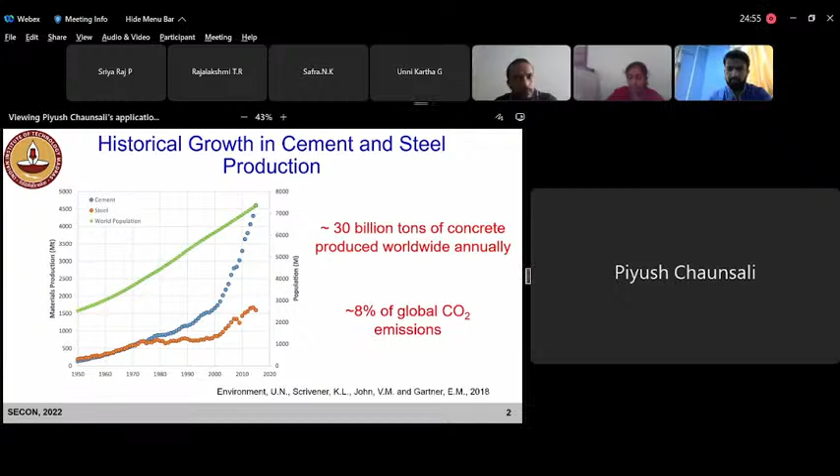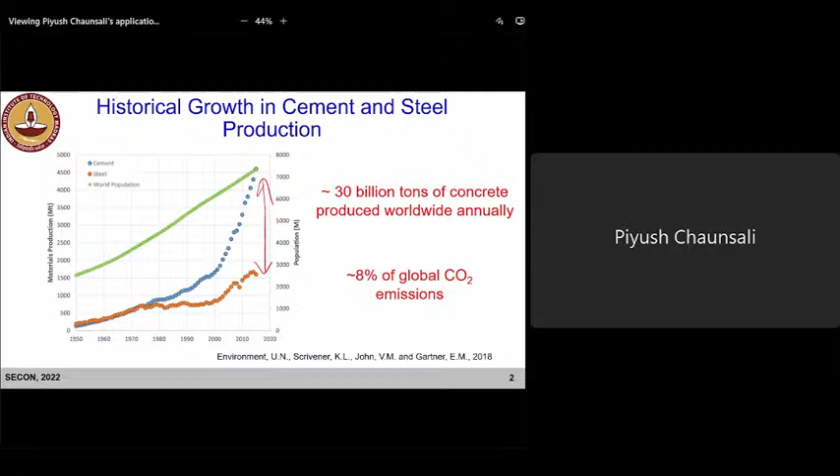If we look at historical growth in cement and steel production, we notice that in the last 65 to 70 years, the growth in cement production has been significantly higher than steel production. That's evident from this plot. You also see how fast population has grown, so there has been a tremendous increase in cement production globally.

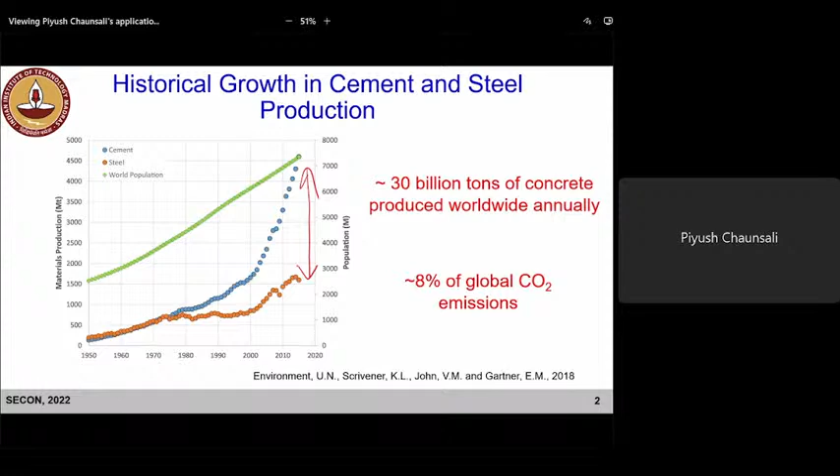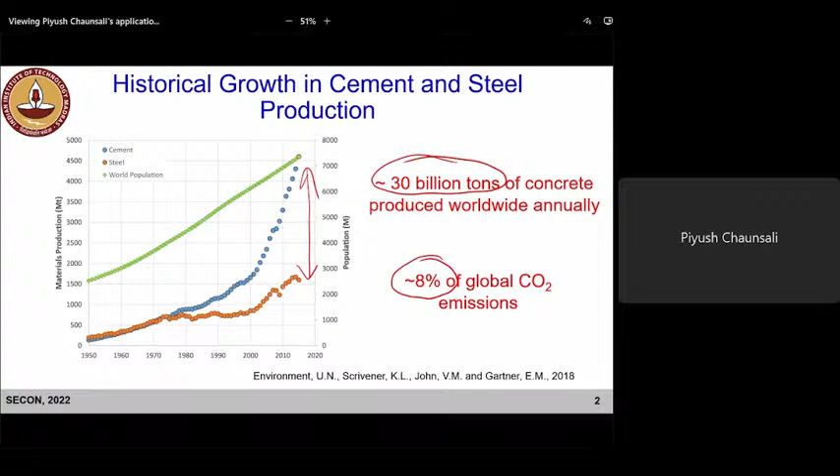If you look at the numbers, cement is used to make concrete, and roughly 30 billion tons of concrete is produced worldwide annually. That's a very huge number. Cement manufacturing contributes to roughly 8% of global CO2 emissions, so there's a significant carbon footprint associated with it. So there has been a push to reduce the carbon footprint of cement manufacturing so that we can cut down the carbon footprint of concrete.

These charts show a comparison. The left one, if you look at just a building, shows existing building versus new construction, and the contribution of construction and maintenance towards global CO2 emissions. Relatively, if you compare new construction versus existing buildings, for existing buildings the heating over lifetime contributes a larger chunk. For newer construction, this share is less, but still you see how much share construction and maintenance has.

Now if you look at the construction of a building, for example, a significant fraction comes from concrete. There are other materials also like steel, bricks, windows, insulation, but see the contribution of concrete. And in concrete, we know we have cement, gravel, sand, etc., and other SCMs. So a significant part of the carbon footprint in concrete is because of cement manufacturing.

In cement manufacturing, we use limestone, and the decarbonation or decomposition of limestone, where CaCO3 decomposes into calcium oxide and CO2, leads to CO2 emissions. This is what happens, and given the significant amount of concrete being produced annually at a global scale, there is a need to look for alternative binders which will have a lower carbon footprint, offering sustainability without compromising on other properties.

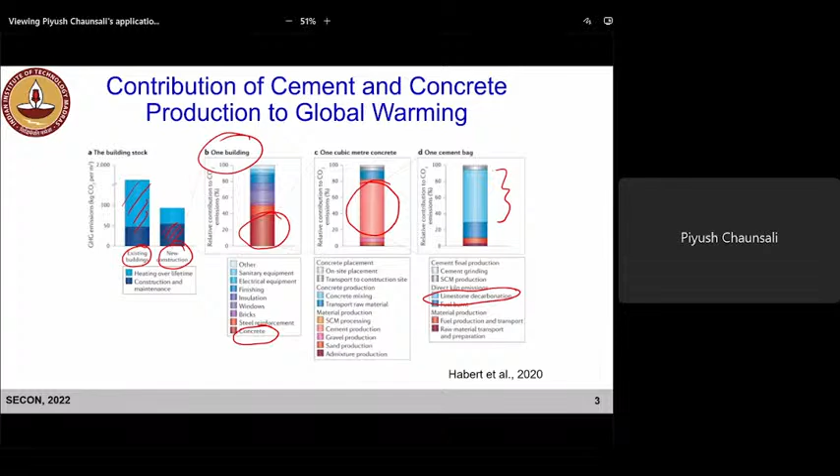With that context, I'd like to introduce this cement: calcium sulfoaluminate belite cement. Some of you may have heard of it, many may not have, but we'll go through the basics. CSAB cement contains these phases: C4A3S, which is calcium sulfoaluminate, C2S, and C4AF. We are quite familiar with Portland cement, which contains C3S, C2S, C3A, C4AF. What we notice is that the CSAB phase does not have C3S—that's the main difference—and it also doesn't contain the C3A phase.

To make CSAB cement, we don't have to go to really high temperatures. For Portland cement, we have to go to 1450 degrees Celsius, but CSAB cement can be manufactured at 1250 degrees Celsius, so there's a reduction in temperature requirement. The raw materials are similar to what we use for Portland cement: limestone, clay, bauxite, and gypsum.

If you look at the phase composition, yeelimite, C4A3S, is the calcium sulfoaluminate phase, also called yeelimite. Because Alexander Klein patented this, it's also called Klein's compound, C4A3S bar. Apart from yeelimite, this cement contains belite, C4AF (tetra calcium aluminoferrite), and calcium sulfate.

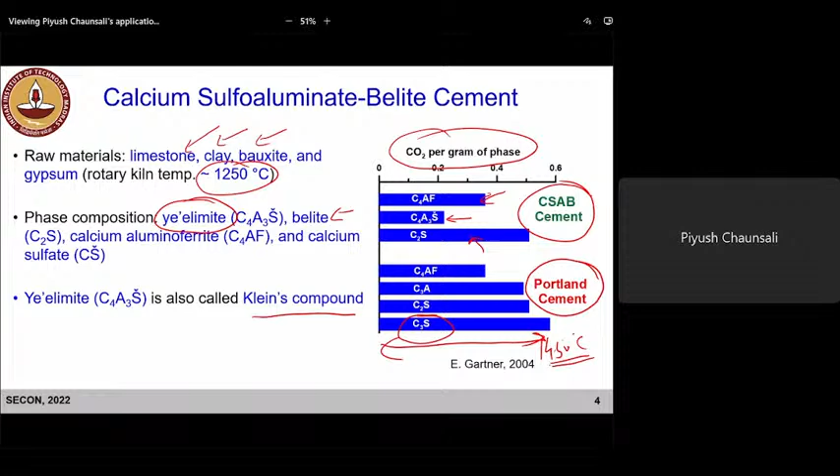Obviously this phase composition changes and that affects the properties. So that's what I will discuss, how different phase composition will give you different properties and how we can manipulate these properties. Overall, the good news is there is a less carbon footprint of CSAB cement.

This ternary diagram shows comparison between PC, Portland cement, and CSAB. CSAB cement has more alumina. In this direction, alumina content is increasing. In this direction, silicon content is increasing. In this direction, calcium content is increasing.

We can see generally CSAB phase composition is closer to this corner, so it has more alumina and less calcium. So less limestone is required to manufacture this cement, which also results in reduced carbon footprint associated with manufacturing CSAB cement.

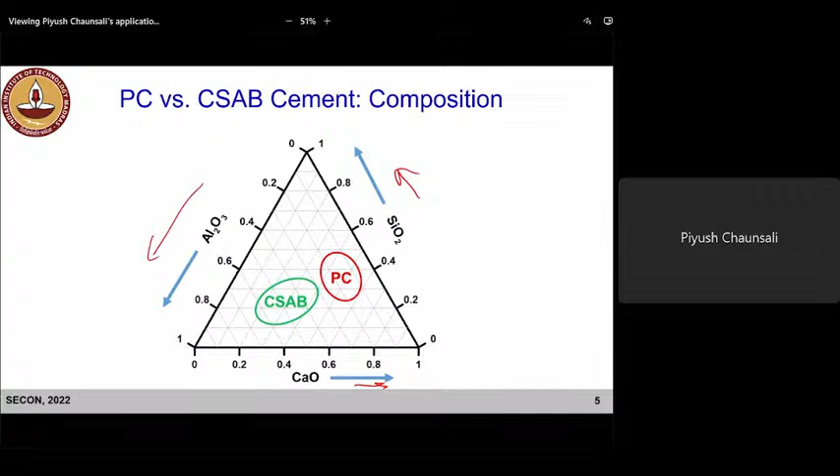So hydration of CSAB cement is different than what we see in Portland cement. This C4A3S, which is calcium sulfoaluminate cement, can just hydrate in presence of water and form monosulfate. Monosulfate is the phase we also see in Portland cement hydration, when later on ettringite converts to monosulfate when the gypsum depletes. Apart from monosulfate, you have formation of aluminum hydroxide. This is the reaction which takes place just in presence of water.

But since we have gypsum in the system, again we are using the cement chemistry shorthand notations, so please refer to these for more clarity. Yeelimite phase can react with gypsum and form ettringite. This is the ettringite. AFt phase also gives you aluminum hydroxide.

Now if CSAB cement is mixed with Portland cement, or we supply additional calcium hydroxide, CH, now we have a larger amount of ettringite which is formed. So these two reactions contribute to expansion, and we'll see how we leverage that expansion to our advantage.

Since I mentioned that CSAB cement may also contain belite, C2S hydration will lead to formation of CSH and calcium hydroxide, as we know. In this case, since AH3 is formed, C2S can also react with aluminum hydroxide and form another phase, C2ASH8, strätlingite.

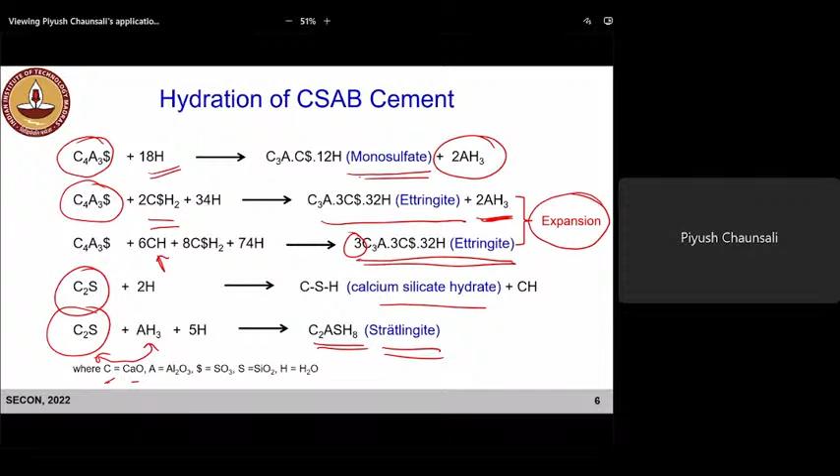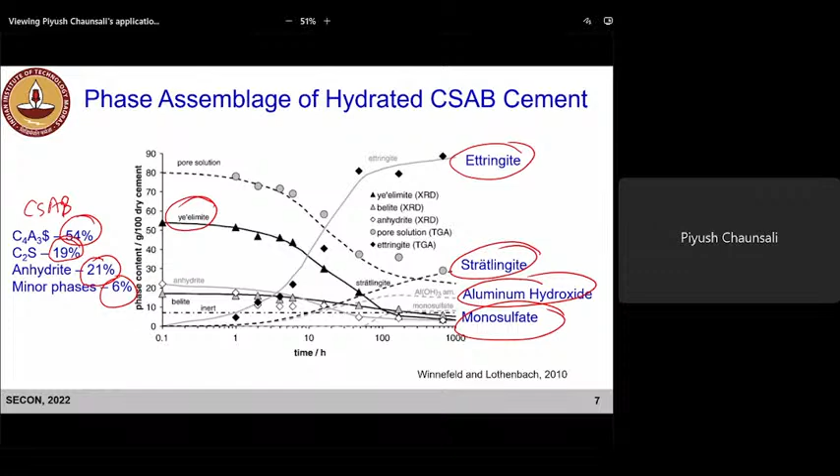So we know about the phase composition. Let's now look at what happens to the hardening behavior, how quickly these CSAB cements harden. That's also very important.

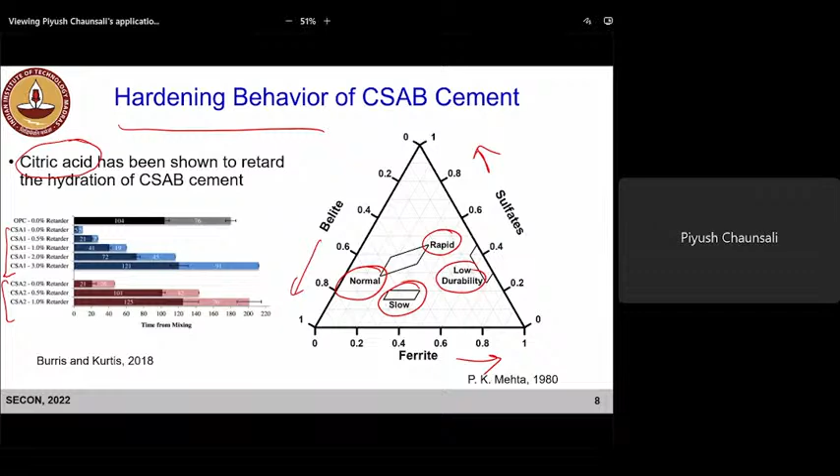Here you see the effect of retarder, in this case citric acid, on two types of CSA cement, CSA1 and CSA2, and how the setting time was influenced by addition of citric acid. So citric acid has been shown to retard the hydration of CSAB cement, but more research is going on looking at other admixtures that can be used to control the hardening behavior of CSAB cement.

So I said that when we talked about the hydration reactions, when you are forming ettringite in presence of gypsum, and when you have both gypsum and portlandite, you have formation of ettringite. Those are expansive reactions. First of all, when we talk about expansion, certainly we don't feel comfortable.

And we know that with time, as it hardens, there is going to be shrinkage, drying shrinkage as you call it. And that drying shrinkage, concrete is shrinking, but restraint is not letting it shrink. So what happens? Concrete is under tension. And we know that concrete is weak in tension.

So what happens when the tension or tensile stresses exceed the tensile strength of concrete? There is cracking, that's what happens. It's called restrained shrinkage cracking. We look at, you take the example of pavements, you see transverse cracking.

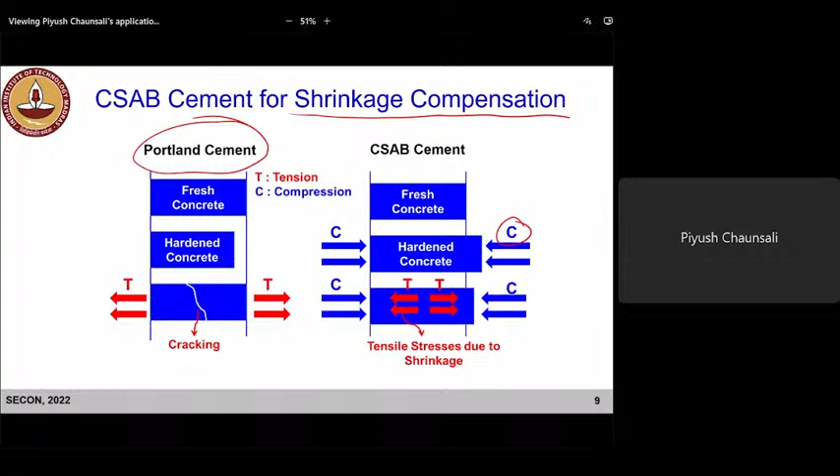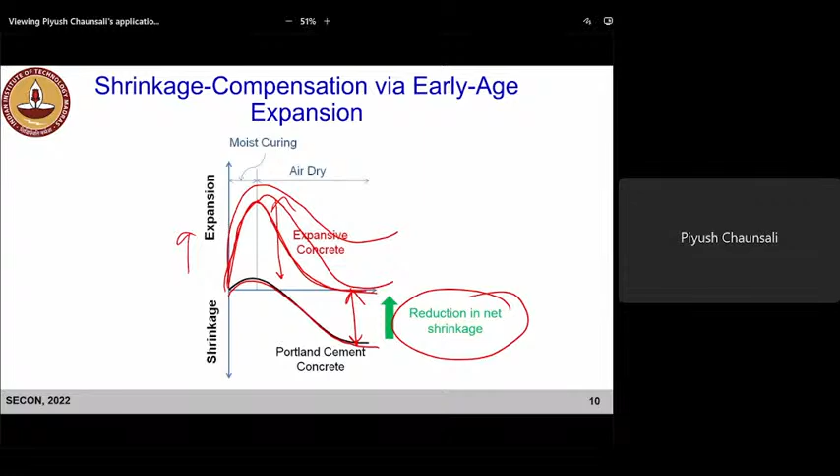So there is a reduction in the net shrinkage. That's what we mean by shrinkage compensation. That's very advantageous when we want to develop a concrete which will prevent shrinkage cracking.

Now we can have both expansive and non-expansive cements. In some cases, we don't want expansion. How do we then tailor or manipulate this property?

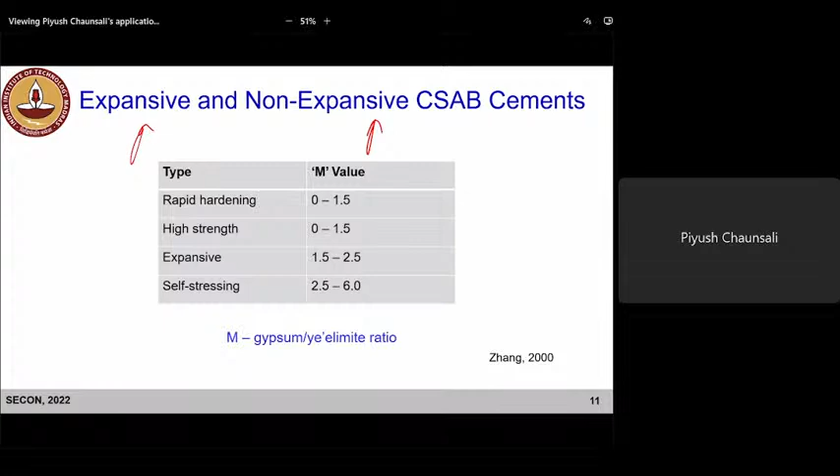Here you see M value is nothing but a ratio between gypsum and yeelimite. Yeelimite again is C4A3S, calcium sulfoaluminate phase. This ratio will affect its hardening behavior and also expansion. If the M value is greater than 1.5, the system expands. If the M value is below 1.5, it's not an expansive system, but you are able to get rapid hardening, high strength. So as a user, this is one way to manipulate its expansion and accordingly the hardening behavior.

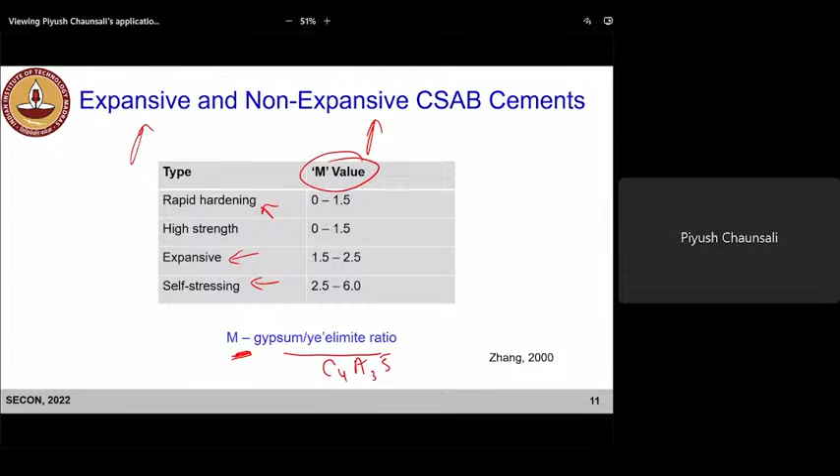So CSAB cement offers you both. It is a low CO2 binder because less limestone is used to manufacture CSAB cement. CSAB cement manufacturing requires rotary kiln temperature of around 1250 degrees Celsius, so you have 200 degrees Celsius difference.

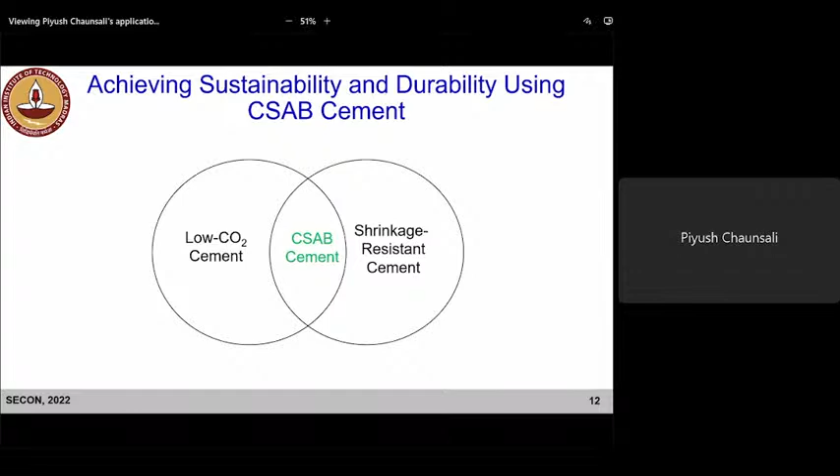Also, this CSAB cement clinker is more porous than Portland cement clinker, so the grinding energy requirement to make this cement is less than what is required for Portland cement clinker. So there are so many advantages - that's why we said low CO2 cement, and we've seen that we can also leverage this expansion for making shrinkage resistant cement. So both low CO2 cement, sustainability, and durability - both can be addressed through the use of CSAB cement.

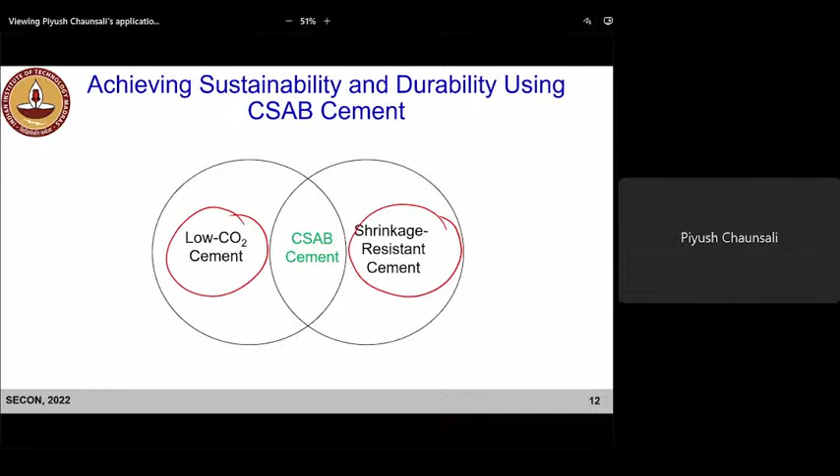So there are already standards. I am showing you the recent shrinkage compensating concrete guide by the American Concrete Institute, ACI 223, which goes through the design - how do we use these cements to develop shrinkage compensating concrete?

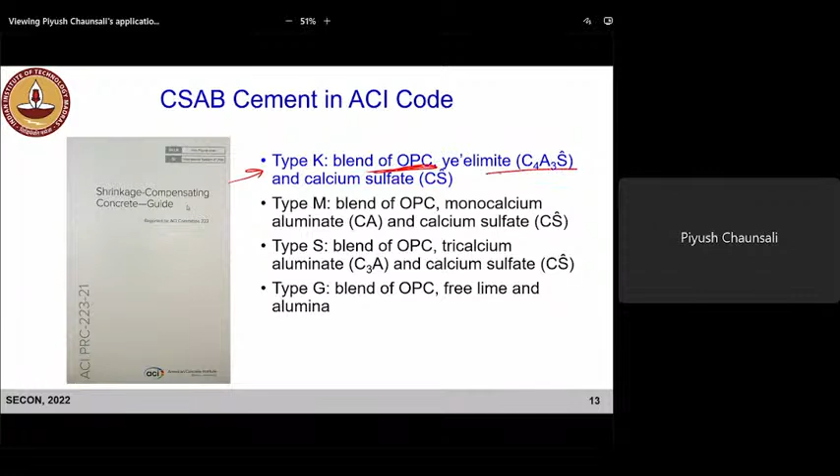So there is already this ACI standard, and in this standard they talk about different expansive cements. One of them is type K, which is nothing but a blend of Portland cement and yeelimite - the calcium sulfoaluminate phase and calcium sulfate. So when we mix Portland cement with yeelimite and calcium sulfate, you get this type K cement.

Okay, there are some other classes. The idea here again is all these are expansive cements, meaning there is an increase in volume as cement hydrates, and we use that expansion to basically design shrinkage compensating concrete. Towards the end of my lecture, we'll also see how we use these guidelines to develop something where we can compensate shrinkage. But type K cement is basically a mix of Portland cement and CSAB cement.

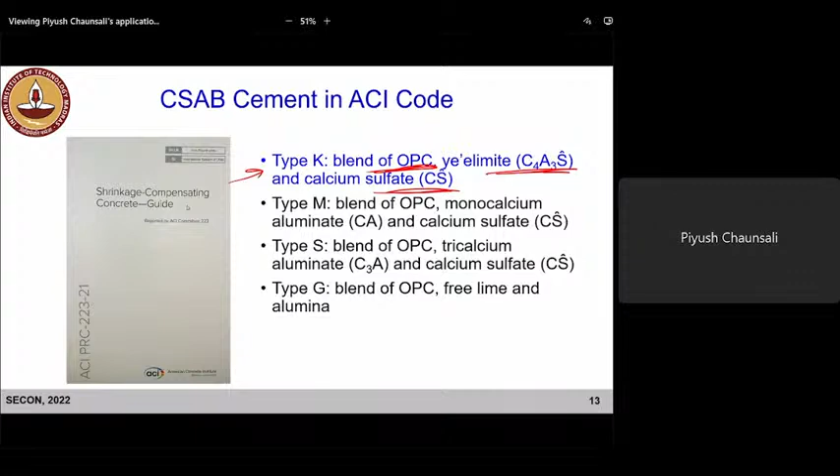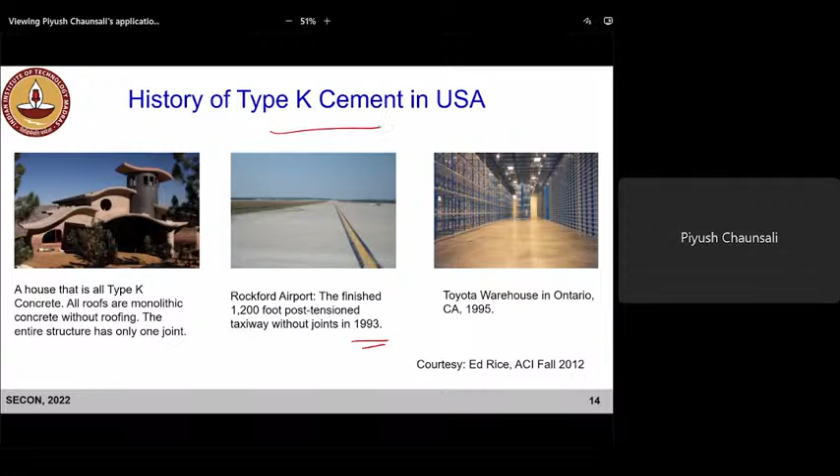Those of you who are interested in knowing which companies make CSAB cement globally, I have just listed a few from USA, Europe, and China. So there are already companies which make this cement.

In some cases, they sell a product like concrete rather than cement. In this case, you see here a zero shrinkage concrete product - rather than selling a cement, they sell this concrete product. The idea again is to have expansion and use that expansion to develop something which can compensate the shrinkage.

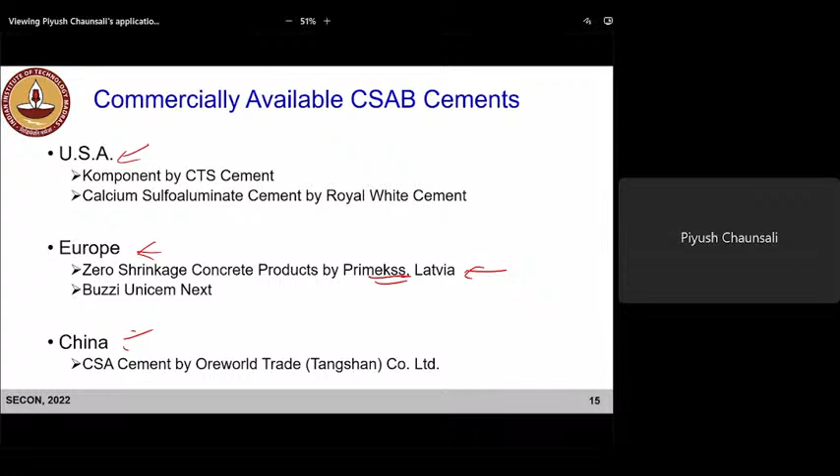Okay, so this I'm just showing you various properties of CSAB cement and concrete. So the left figure is for concrete.

CSAB cement can also be used as an expansive admixture. As we saw, type K cement is an expansive cement where CSAB admixture is used. In that case, CSAB cement enhances your strength. When we add CSAB cement to Portland cement, there's some increase in strength, and you see the effect of other admixtures too. So you don't compromise strength.

When we use CSAB as an expansive admixture, in some cases you see increase also. Here is an example of concrete, here is an example of paste, from our lab here at IIT Madras, when CSAB cement is used as an expansive admixture. In a paste, you see the strength increases.

5 to 10%, that's the typical replacement level, though it's suggested around 10 to 15%. Because when we use CSAB cement as an expansive admixture, we are basically inducing expansion. So this is basically an OPC-CSA blend, where 85 to 90% is OPC and 10 to 15% is CSAB. Again, this is for getting the expansion so that we can develop shrinkage compensating property.

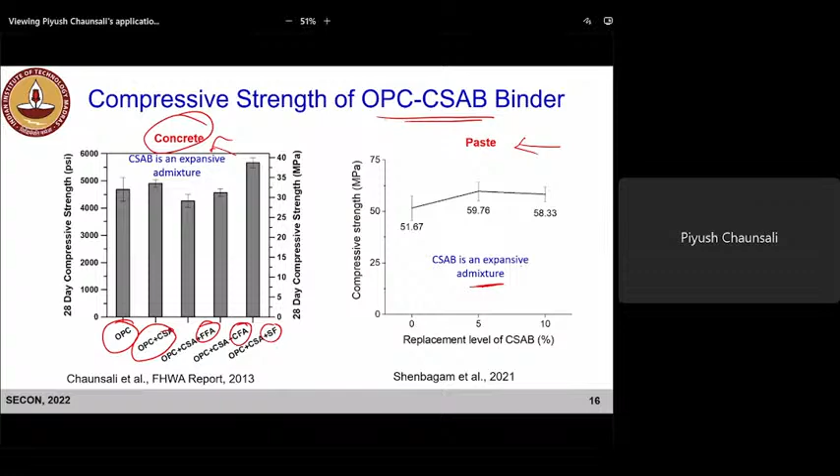But we'll see later, in this case CSAB cement is a sole binder. So you can have a CSAB cement which will not expand, basically a non-expansive CSAB cement. And we know this will depend on the M value. What is the M value? How much gypsum you have, what is the gypsum to yeelimite ratio. So we have both types, expansive and non-expansive.

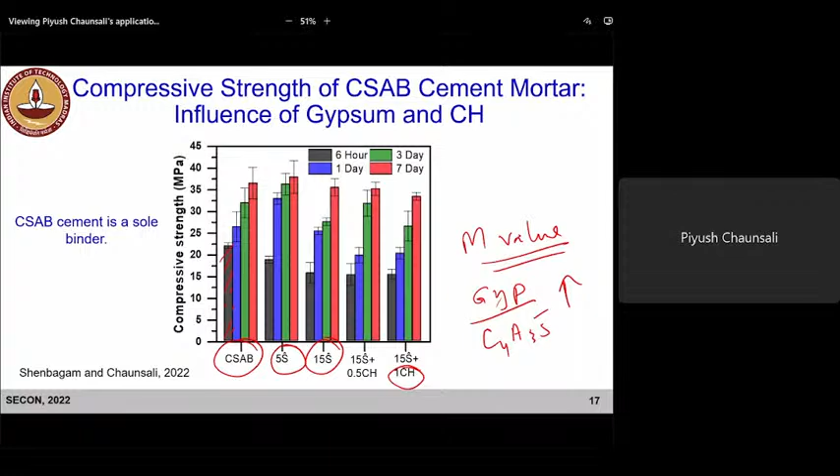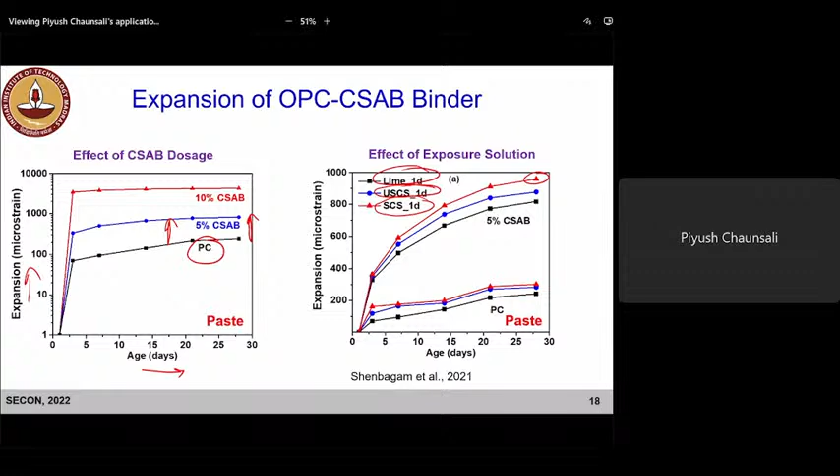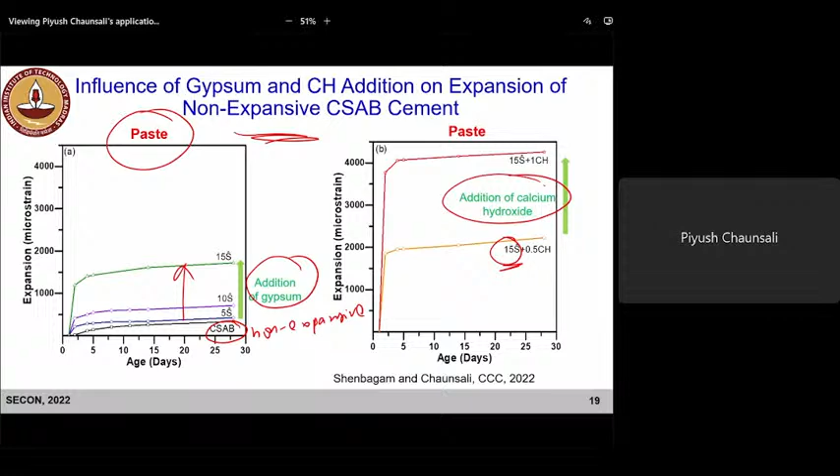But we'll also look at whether there are any changes in the pore structure. When we have so much expansion, can we differentiate non-expansive and expansive systems based on the pore structure?

Before that, in CSA cement there is a reduction in pH. Portland cement pore solution will have 13 to 14 pH, but as we add CSA, there is a reduction in pH. In this study though, we saw that the minimum pH was still around 13. Why is this important? Because when we talk about carbonation, when the pH is low, becomes 10 or 11, the propensity towards carbonation increases, and carbonation may then induce corrosion.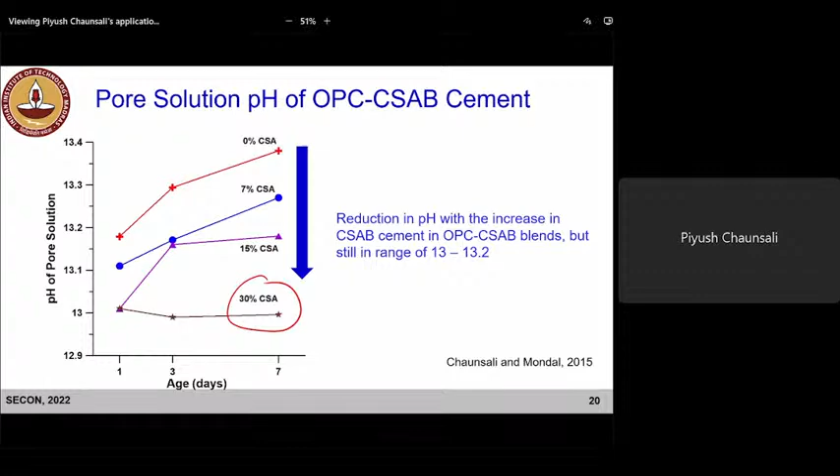So a lot of work is going in that direction where people are looking at the carbonation of CSA cements and what is the propensity of steel corrosion in these systems, and how do we reduce that.

For hydrate mineralogy, X-ray diffraction can be used to look at the phases formed during hydration of CSA cement. You see significant amounts of ettringite, the crystalline phase responsible for expansion. As we increase the amount of gypsum, we see an increase in the amount of ettringite. Also notice the Y, the yeelimite peak, around 23.4 or 5 degrees 2 theta. We can monitor how quickly this disappears, since basically this is the phase which is hydrating. By monitoring its amount with time, we can also estimate degree of hydration.

On the right side, this is developed using GEMS, a thermodynamic modeling tool for these systems, and we saw the effect of calcium sulfate addition. This modeling predicts that as you increase the amount of calcium sulfate, the amount of monosulfate will decrease and the amount of ettringite will increase. That's what we also saw, and the modeling also predicts that beyond a certain percentage, you will be left with gypsum. In addition to these phases, you also have aluminum hydroxide.

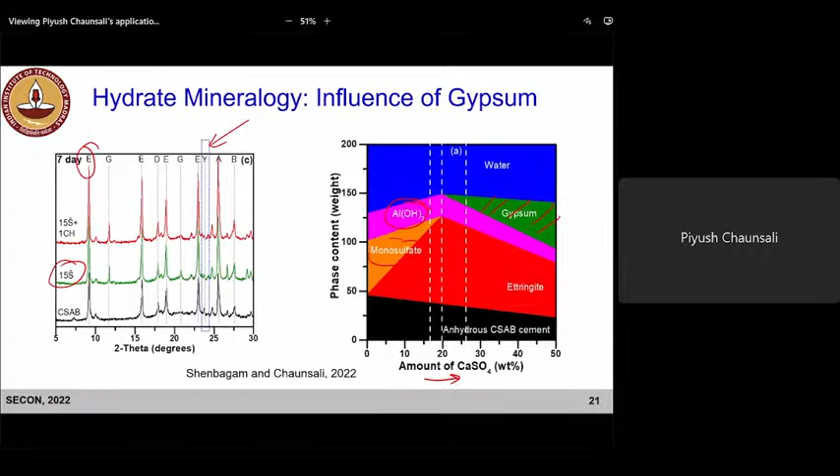A couple of slides back, I told you that a non-expansive binder can also be converted to an expansive binder. So what kind of changes happened in the pore structure? We looked at MIP results, mercury intrusion porosimetry, to examine the pore structure. What we noticed is a clear difference between the non-expansive system and the expansive system.

This is the CSA cement by itself, which doesn't expand, but upon adding extra sulfates in the form of gypsum and calcium hydroxide, you see a shift in the peak. So critical pore size reduced in expansive cementitious systems. We saw this as early as 1 day, and also at 7 days. So this was the differentiating factor between non-expansive binders and expansive binders.

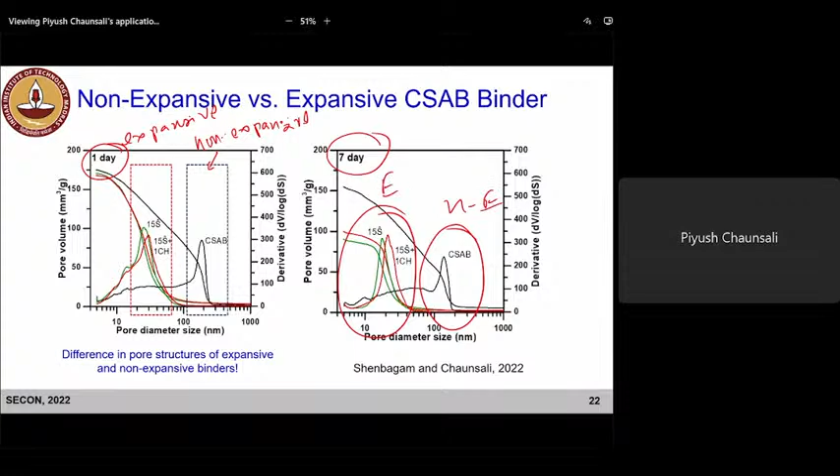So what is causing this shift in critical pore size? We'll see that this expansion is basically influenced by the M value, which is the gypsum to yeelimite molar ratio, and the amount of ettringite. The more ettringite you form, the higher the expansion will be. Also, supersaturation with respect to ettringite matters.

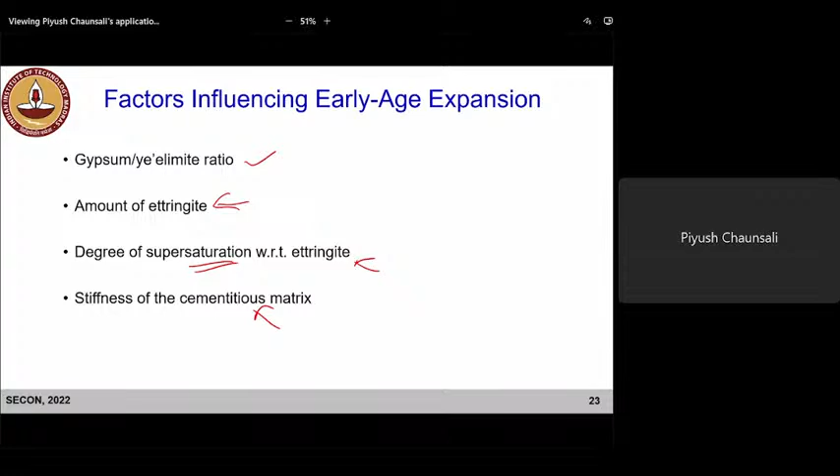What is the environment? What is the supersaturation? And also matrix stiffness, whether the stiffness is high or low, because basically these are crystals which are in a matrix. If the matrix is not very stiff, or not resisting this expansion, then we'll see overall high expansion. So all these factors affect the expansion.

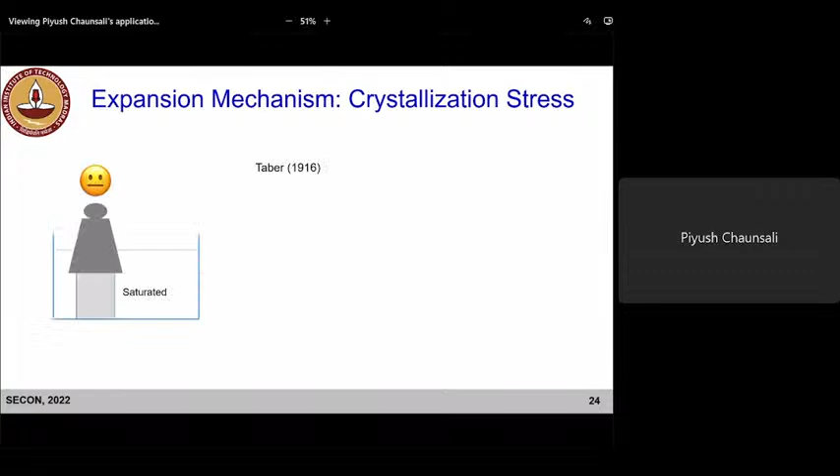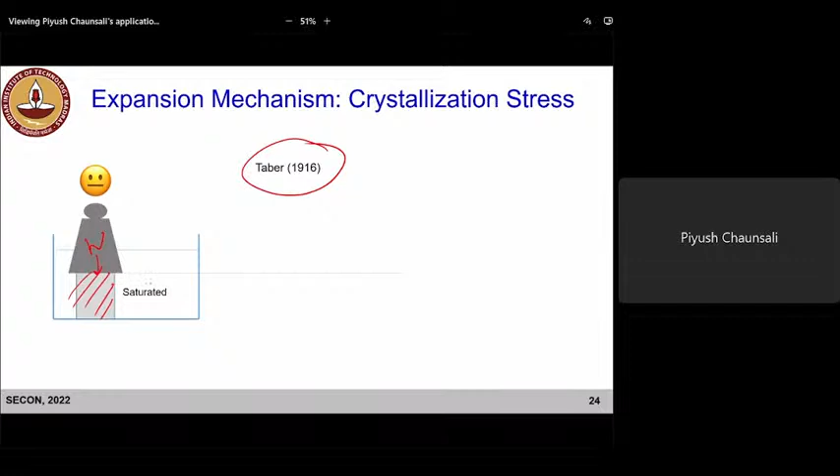So what is the mechanism? Taber did this experiment in 1916. There is a salt crystal in a saturated solution, and there is a weight pressing on this salt. So here is a saturated solution, not undersaturated, not supersaturated. So what happened when he allowed evaporation?

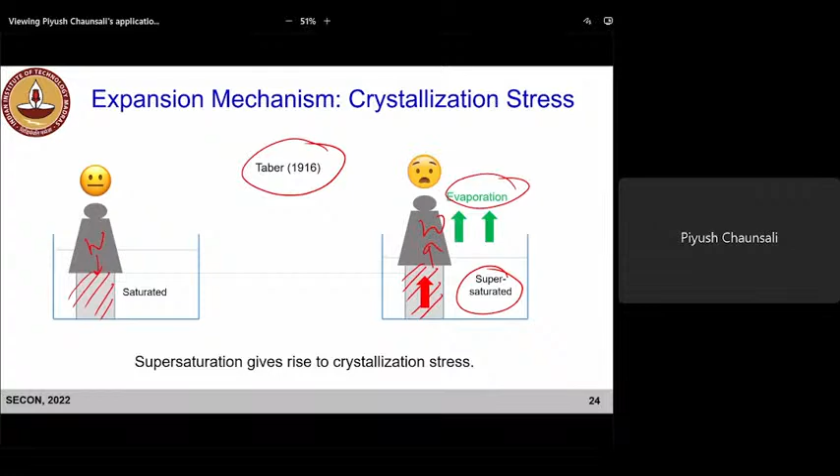This solution became supersaturated, meaning concentration of ions increased, because water must have evaporated. That led to crystallization of the salt, and that pushed this weight up. So this induced crystallization stress. The driving factor for crystallization stress is supersaturation. That's why, if we can somehow estimate the supersaturation, we will get an idea about what degree of crystallization stress is there in cementitious systems.

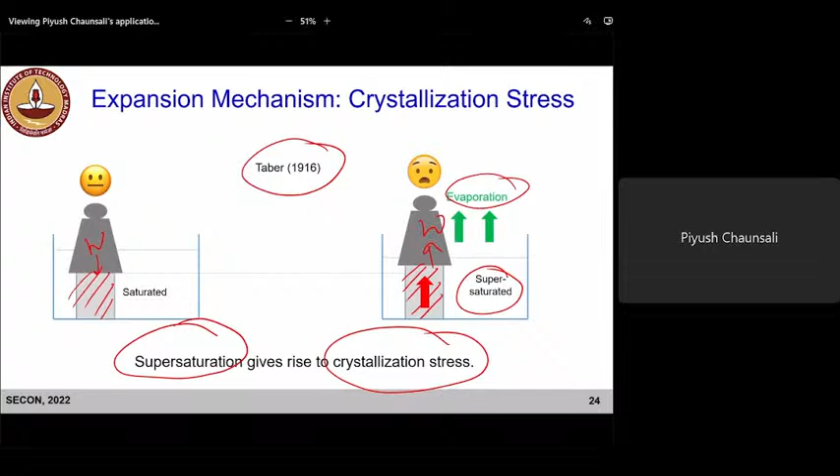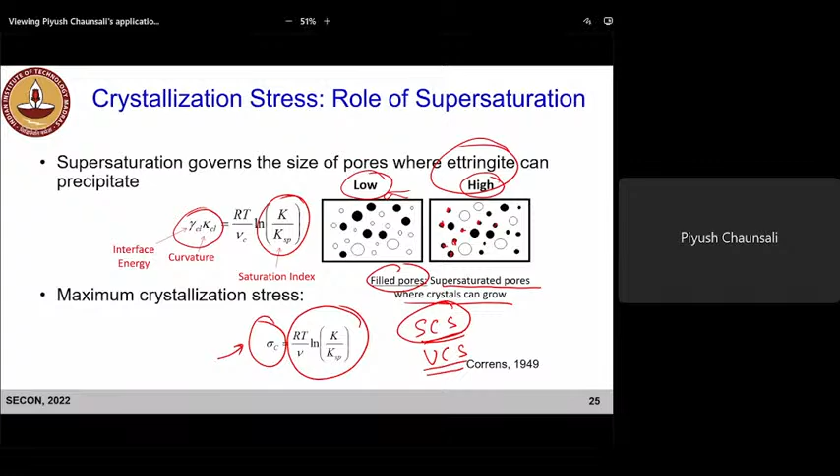By estimating this supersaturation, we can also calculate what will be the crystallization stress, and we can compare situations. For example, when talking about the exposure solution, when we had a saturated solution of gypsum, that led to increase in expansion compared to undersaturated solution of gypsum. This is primarily because the supersaturated solution of gypsum had higher saturation index. So now we know the mechanism: supersaturation is driving crystallization, and these crystals precipitate in the pores. When they precipitate in smaller pores, it induces higher crystallization stresses.

This is some of the recent work from our lab here at IIT Madras. We are also looking at durability. Because of the high alumina content of CSAB cement, they are a potential candidate for applications such as sewage pipes, where concrete is exposed to acidic environment. So we are looking at acid resistance of CSAB cement concrete, with citric acid being the most deteriorating acid. We looked at that, and you can see.

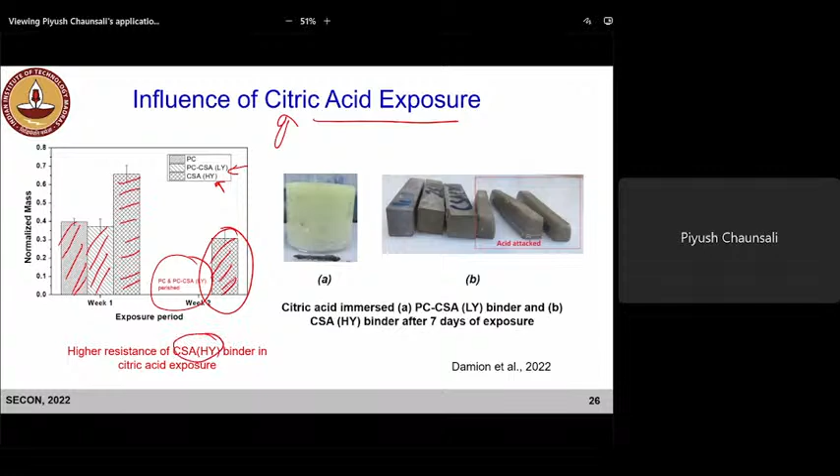Basically, you put these specimens in citric acid, and the PC-dominated binders perished. Compared to this, the sole binder CSA cement, basically high yeelimite cement, was not perished. Obviously with time it also deteriorated, but see the difference. There's at least higher resistance of CSAB cement, in this case high yeelimite cement, in citric acid exposure. You can see the difference. So here this is PC-dominated, like Portland cement, when it is 100% or when 10% is replaced with expansive admixture. That's what happened, and here you see the high yeelimite system.

So current work is looking at different types of acids and different concentrations, so that we have a better idea of what kind of formulation will have higher or lower resistance. We are trying to understand this better.

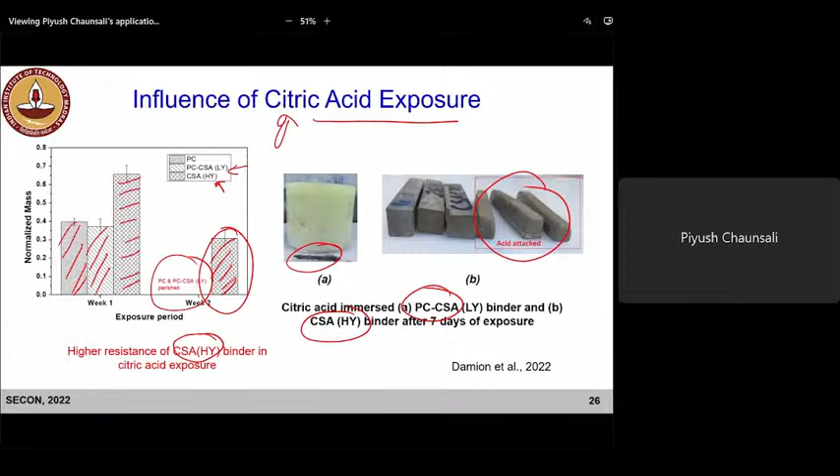This is the final section where we'll look at how do we design CSAB cement concrete. So we have a cement, now let's say if you want to prevent shrinkage cracking, how do we use this cement to design that? There are some design charts. Based on the location, we know how much shrinkage compensation is needed, because shrinkage is driven by environmental conditions like temperature, relative humidity, etc.

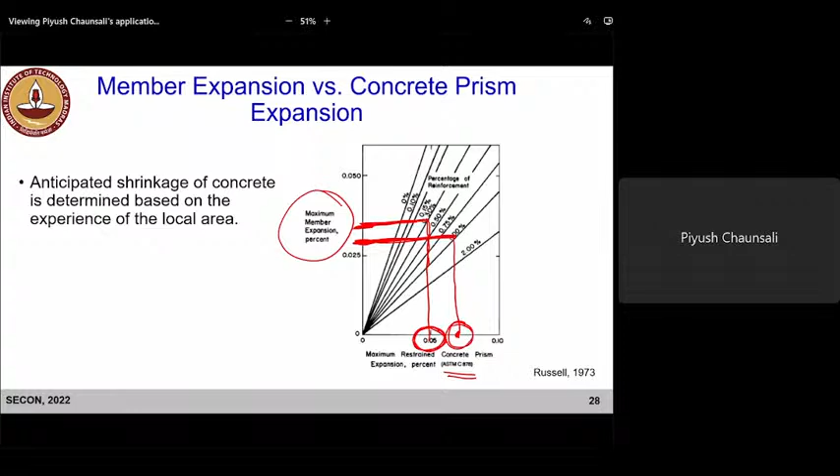So these design charts can be used. We can derive, for this much expansion in the field, or this much compensation we want, depending on the reinforcement, this much restrained concrete prism expansion, and then design the mix so that we get this much expansion here, 7-day expansion. So that's how we design this shrinkage compensating concrete.

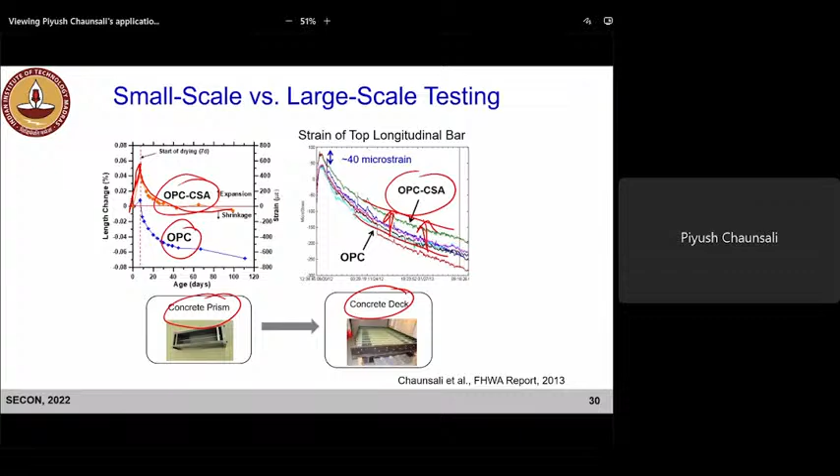So I will show you field application. I was involved in this. This is the bridge deck in the state of Illinois in USA, where we developed this CSAB concrete, and this was a test study where we wanted to see the difference between CSAB cement concrete and Portland cement concrete as far as shrinkage compensation is concerned.

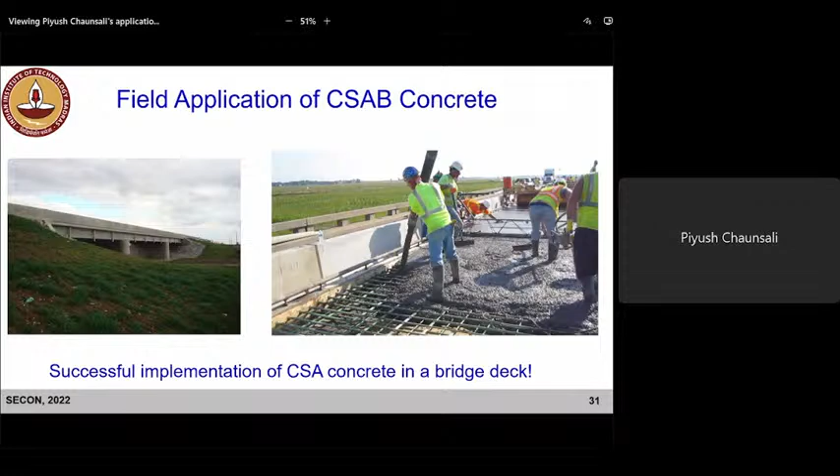So we cast two slabs, one with the CSAB concrete. You can see it was quite workable, had good finish, and then we also cast the OPC, Portland cement concrete deck, next to this CSAB concrete deck. So this is the final image, and we then looked at the cracking pattern. So you see here there were cracks in the Portland cement concrete deck.

Again, this is because of the shrinkage. Concrete tries to shrink because of the restraint. There is a tension, and that tensile stress, when it exceeds tensile strength, will crack the concrete. So that happened in the Portland cement deck, but these cracks didn't appear in the CSAB concrete. So this was the performance comparison between CSAB and Portland cement concrete. As far as shrinkage compensation and resistance against shrinkage cracking is concerned, this cement is a solution for that.

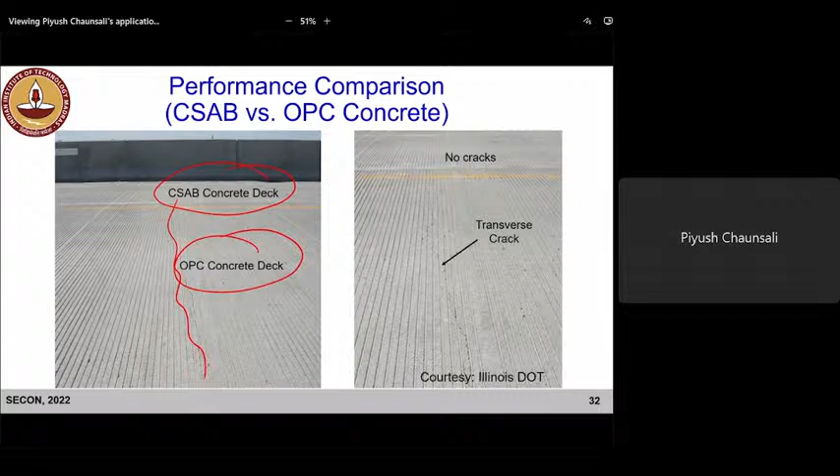So let me summarize what we discussed and where current efforts are being undertaken. CSAB cement can offer up to 30% reduction in the CO2 footprint, so if you want to develop sustainable binders, this is a potential candidate. Grinding energy requirement is lower because of the porous nature of CSAB clinker, and you can attain rapid setting strength development using CSAB cement, and it has advantages.

Let's say if you want to open the traffic early, because we don't want to hold things for a long time - in these situations, again, CSAB cement can be used. And this expansive characteristic, because of the volume increase, can offer excellent resistance against shrinkage cracking.

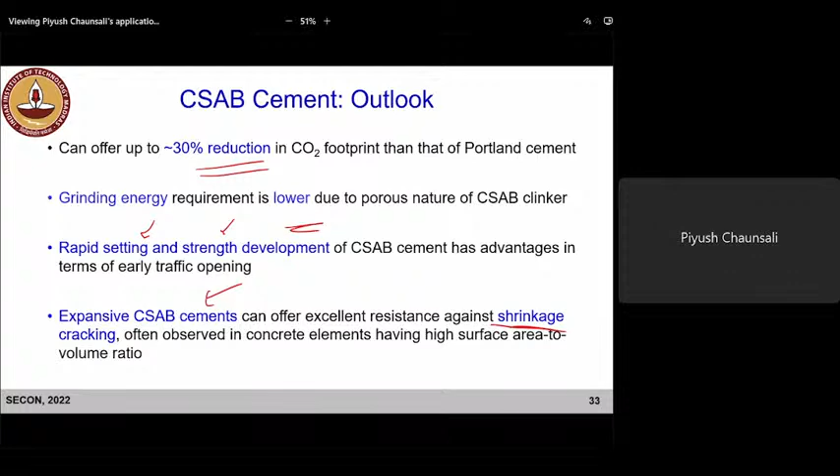And we know that once the concrete cracks, what happens? We are exposing our steel to atmospheric CO2 or chlorides, and then corrosion starts. And when corrosion starts, that will lead to degradation. So we want to prevent the cracks in the first place - that's the idea. And in this case, the expansive nature of CSAB cement can be used to prevent shrinkage cracking.

Current challenges: because of the use of bauxite with high alumina content, there is a high cost associated with it. Our lab here at IIT Madras is looking at alternative sources, like currently available waste materials which can be used to manufacture this.

Reactivity of belite is another challenge, because belite content can vary and be significant in these cements, and we know that the belite C2S phase is not very reactive. How do we enhance the reactivity?

That's one current challenge. Chemical admixtures for controlling setting of rapid setting CSA cement is also currently being researched. And long-term durability against carbonation and steel corrosion is another, because the pH of this system is lower than the Portland cement system, so there is greater propensity to carbonate, and when it carbonates, there is also propensity to corrosion. There has been some work currently going on to look at that aspect.

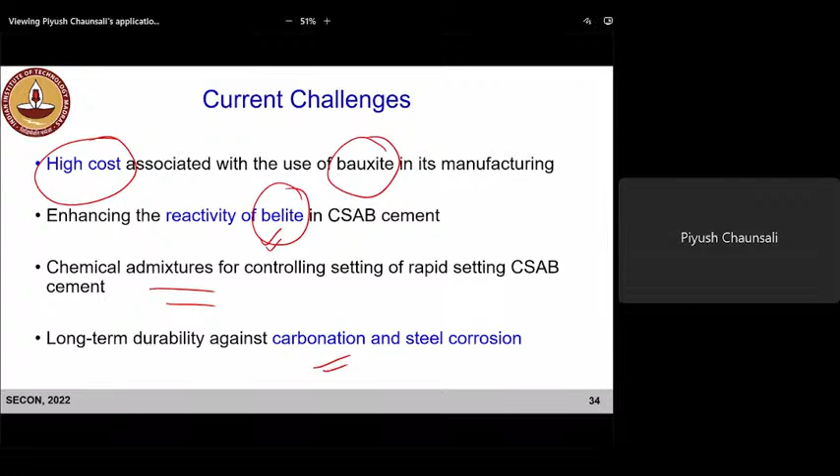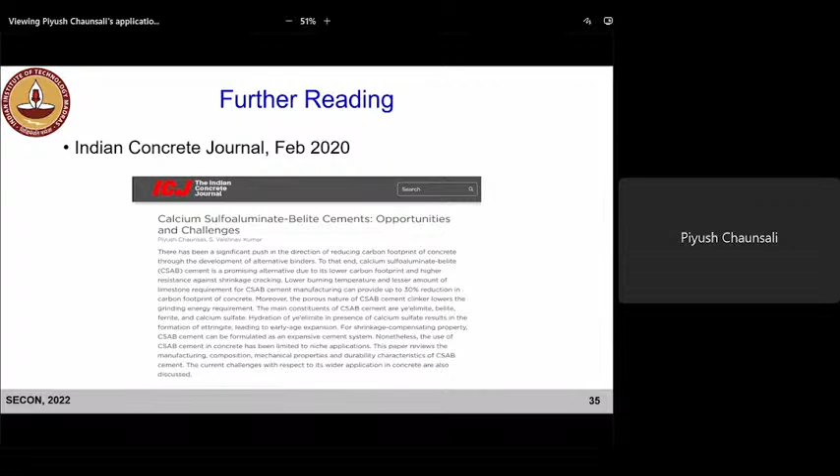For those of you who would like to know more about this, we have written a paper available through the Indian Concrete Journal, titled CSA Cements, Opportunities and Challenges. It summarizes where we are, the way forward, and what the challenges are. For more details, I'd refer you to look at this. If you don't have access, feel free to email me, I'll be happy to send it.

Finally, acknowledgements. Part of the research shown here was supported by ICT at the University of Illinois, and current work is directed to understand the system better so that we can manufacture the cement in India, as there is no manufacturer currently making CSA cement, although there are some advantages. I acknowledge the support of IIT Madras and our AIMS lab here.

With that, thank you for your attention. I'll be happy to take any questions you may have.